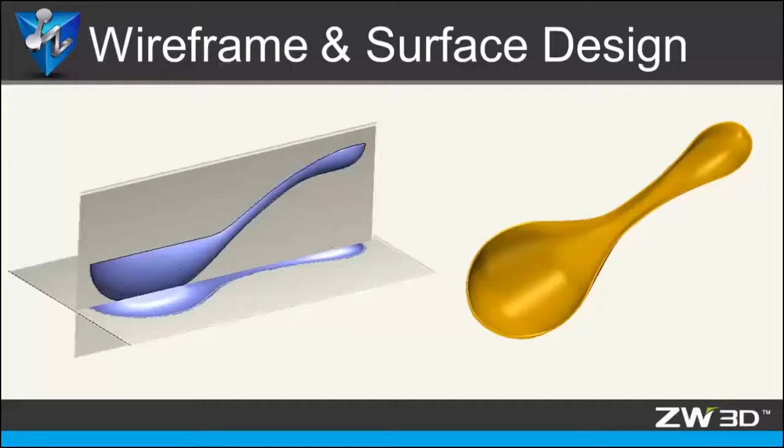Wireframe and surface design, the spoon case. Today, in this tutorial video, we will learn how to create 3D profiles based on the model pictures and how to do quality surface modeling.

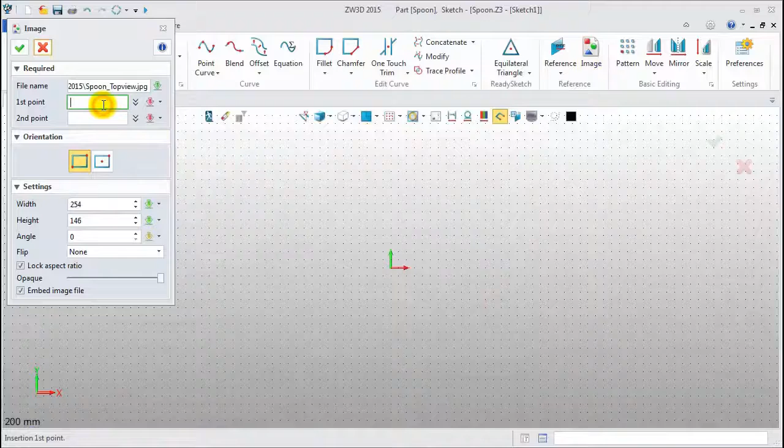First, create a new file and name it Spoon. Insert a sketch and set it on the XY datum. Click Image to insert the top view picture. Pick the origin as the first point, set width to 300 millimeters, then click OK.

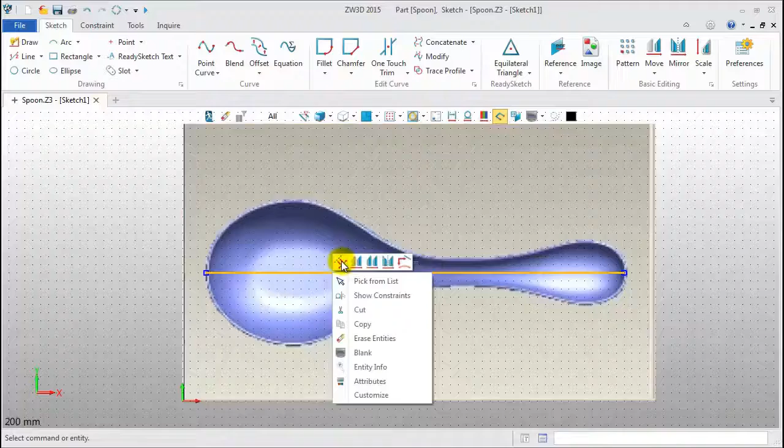Then use the Line tool to create a center line. Right-click and pick Toggle Type to convert this line into a constructive line. Then move all shapes.

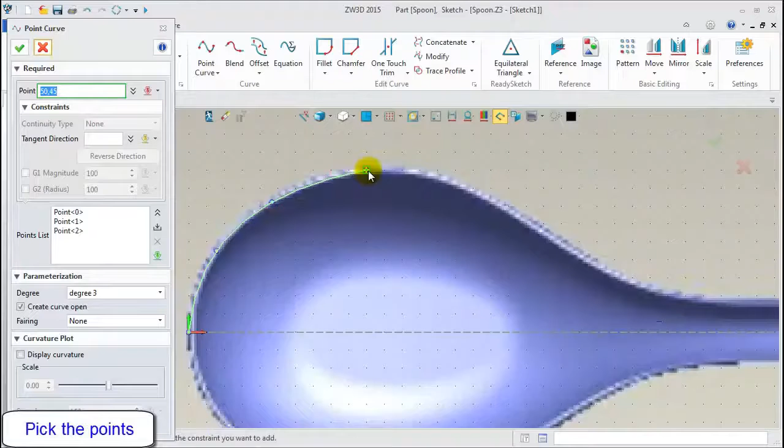Thereafter, click the Point Curve feature. Refer to the image and pick profile points one by one. Using the Curve preview, select the suitable position. Totally, about 15 points should be selected.

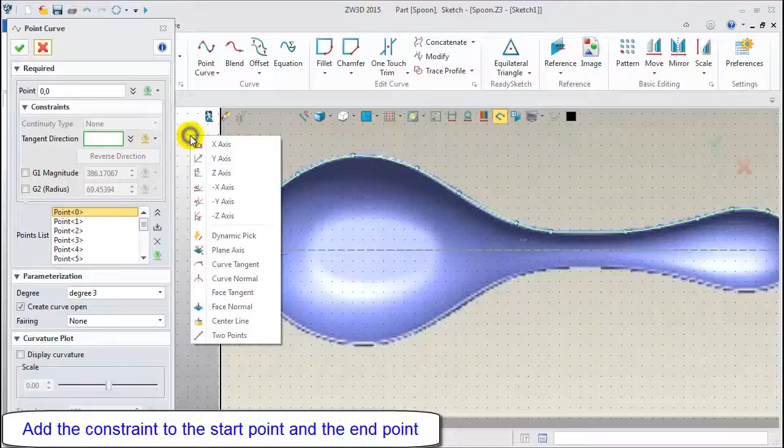After that, select a start point from the list and define the tangent direction. Pick an endpoint and define the tangent direction. Click any point and with the handle, adjust the point position.

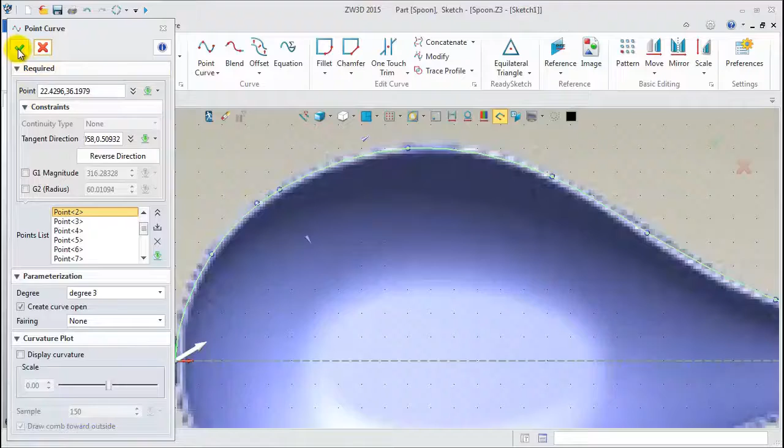Now, let's check the profile sketch. Blank the image, then exit the sketch.

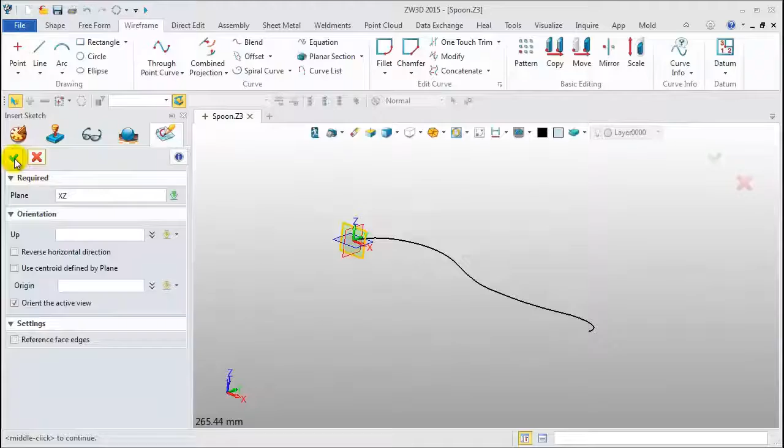Next, we need to create the second sketch. Set it on the XZ datum. Click Reference and pick the first sketch curve.

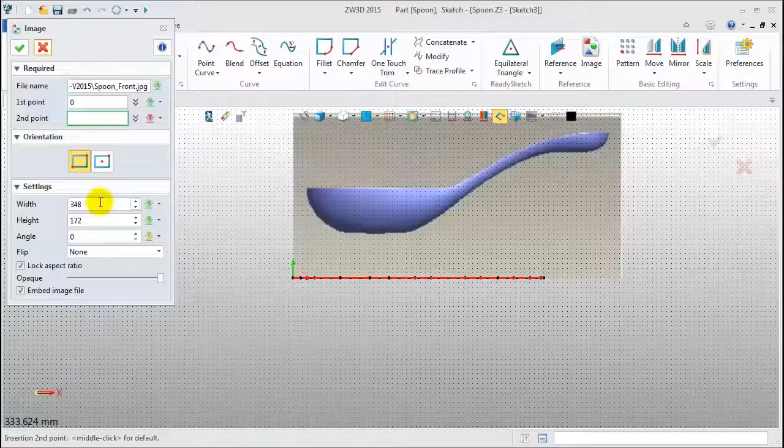Click Image and insert the front view image. Set first point to 0, set width to 300 millimeters, click OK. With the following, create some lines for relocating the image.

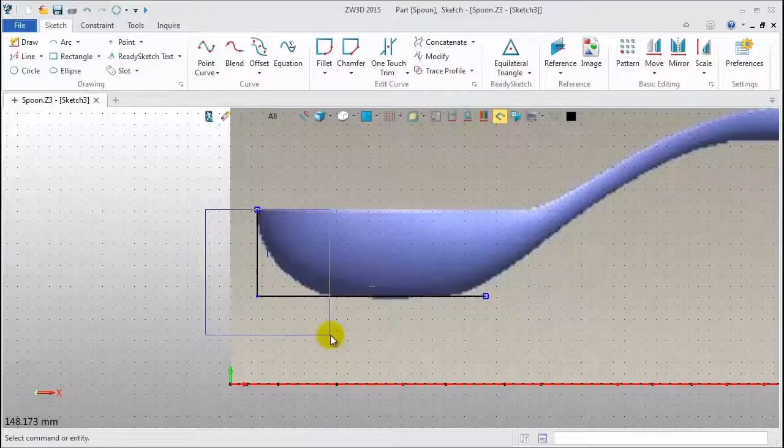Draw the vertical line like this, and draw this horizontal line. In the window, select all shapes and move them to the matched position. Then create another vertical line.

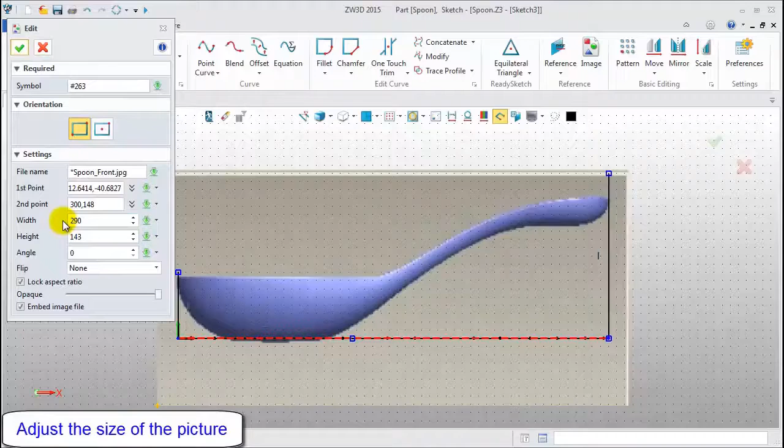Double-click the image to edit and adjust the image width. Convert these lines to constructive lines.

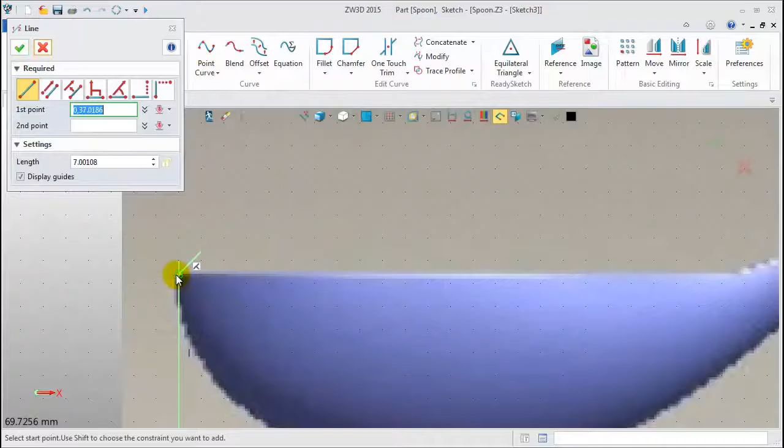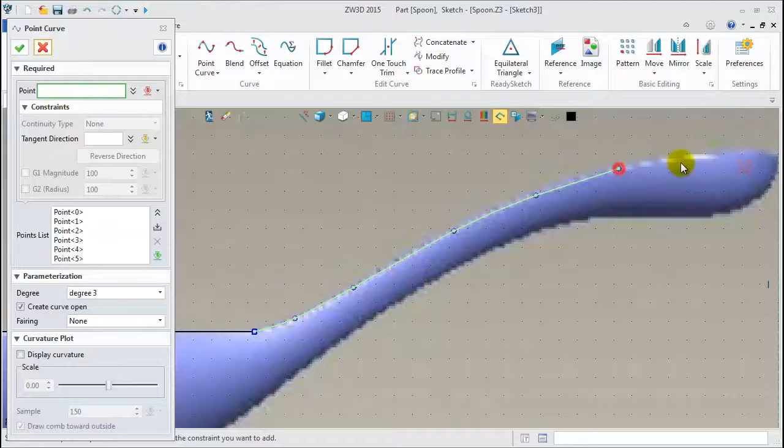Next, we will draw the profile curve, referring to the image. The first segment is a line. Click the Point Curve tool and pick the profile points one by one. The last point should be located on the vertical constructive line.

Then create a fillet on the connecting area and connect them together.

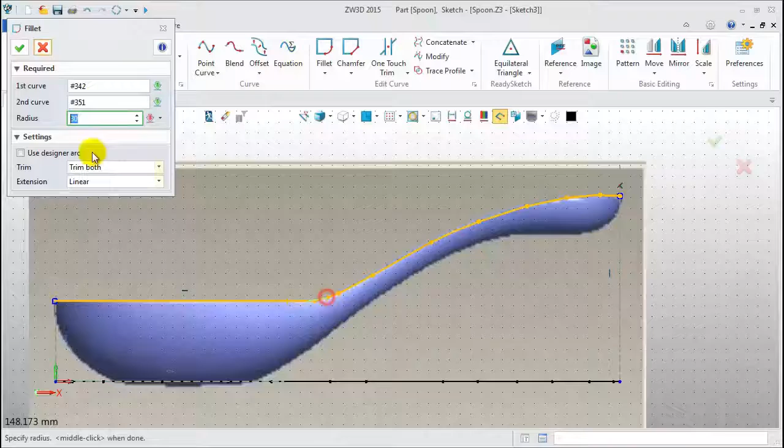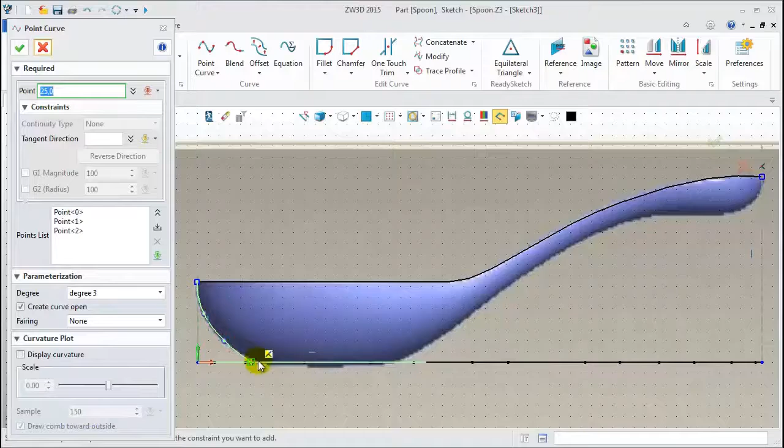Next, create the bottom profile curve. Pick points one by one. Create the second segment, picking more than 10 points according to the image profile. The last point should coincide with the end point of the top curve.

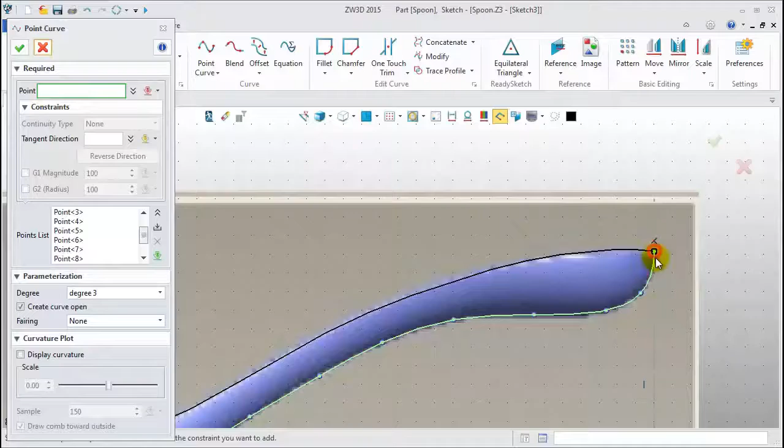Add a line, then create the fillet between curves.

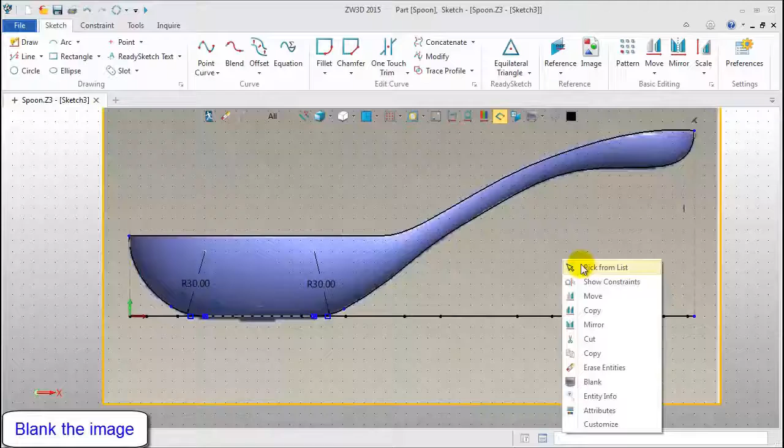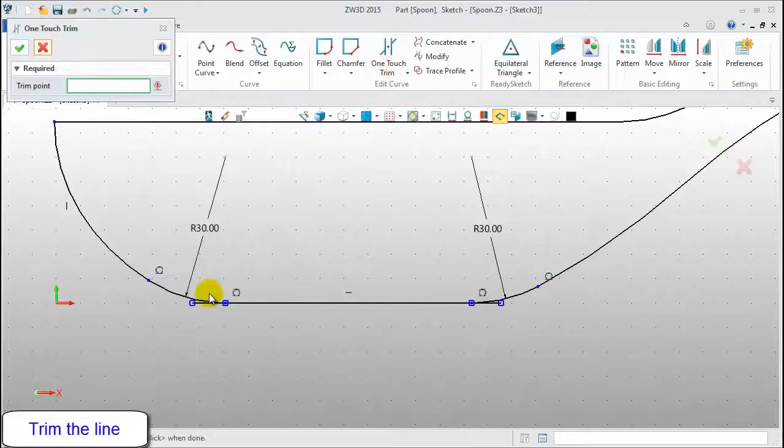Now, blank the image and constructive lines. Click One Touch Trim and pick the unneeded curve until there are no more.

Finally, connect them together, then exit the sketch.

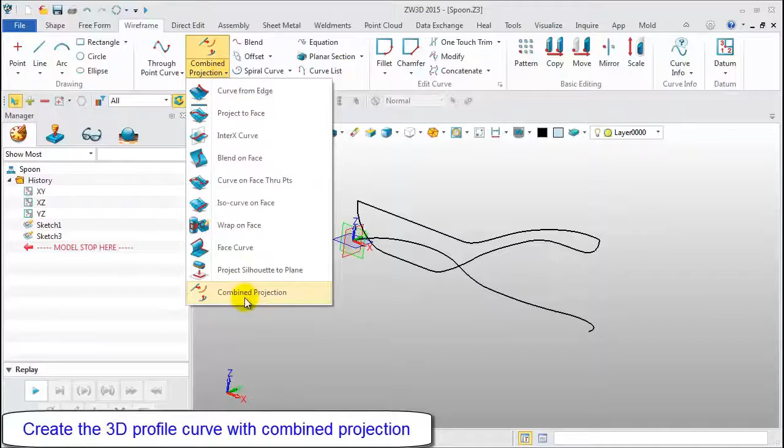Pick the Combined Projection tool. Select the top profile curve, direction Y-axis. Pick the first sketch curve, Z-axis. Click OK to get the 3D profile.

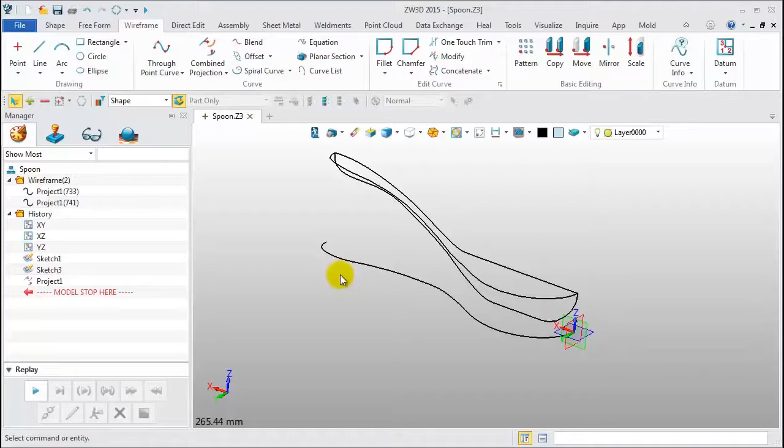Next, we will create several datums for drawing a section curve. Pick a suitable point on the bottom profile curve. Blank Sketch 1 for a clean view.

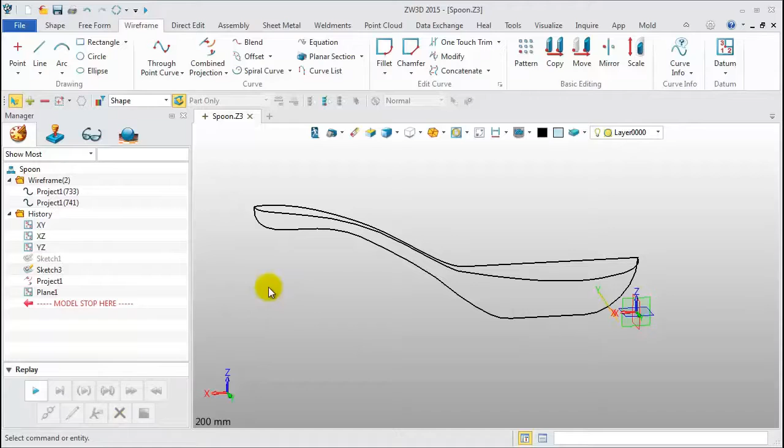Then, adding datums, click Datum and pick Point until done. Now, 6 datums have been created.

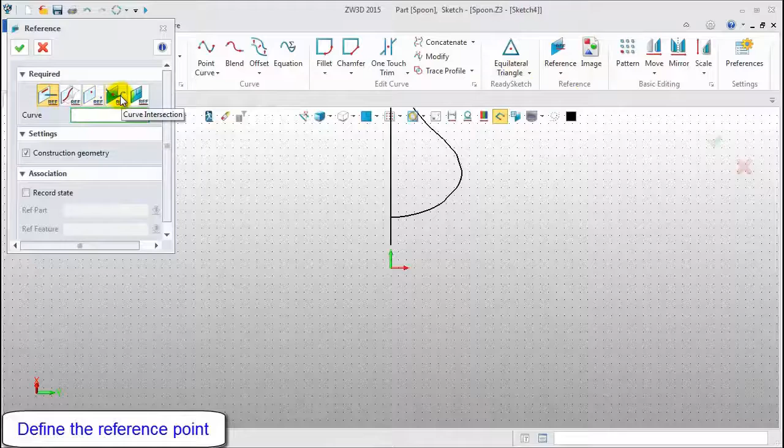In the following, draw the section profile in each plane. Click the Reference command to define the reference point. Pick a curve to get the intersection point. Click Plane View and Show Target.

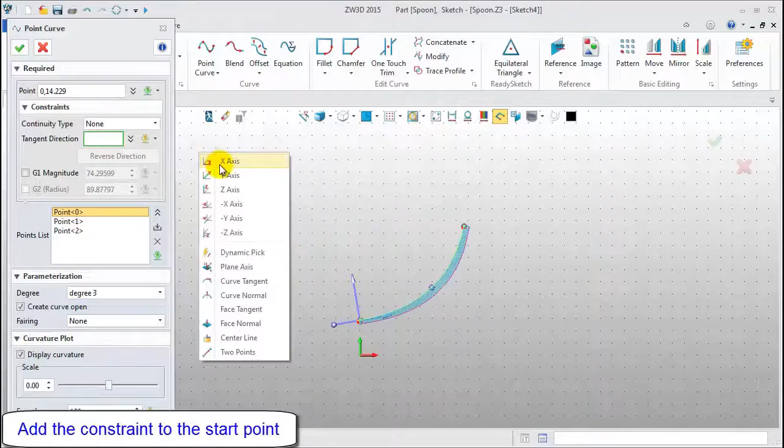Next, create a curve. Pick a reference point, a middle point, and another reference point. Show Curvature and add tangent direction for the first point. Adjust the middle point position to get the more equal curvature.

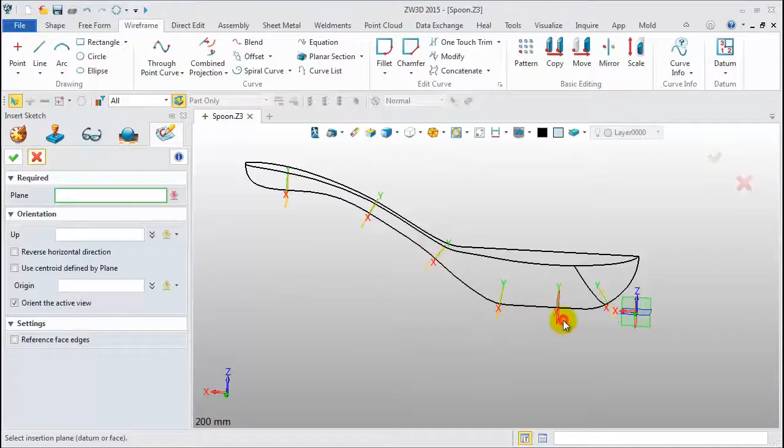Finished. After that, we will use the same method to create other section profiles. Define the reference point, then use the Point Curve command to draw the section profile.

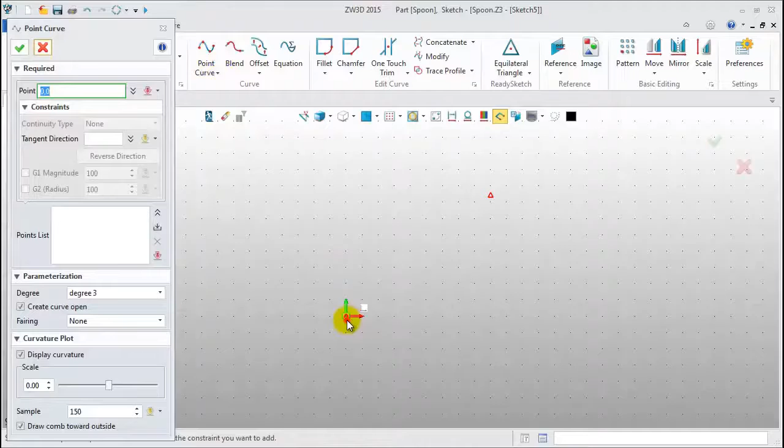Now, all 3D curves are finished. Click Extrude and pick the bottom profile curve to create a surface.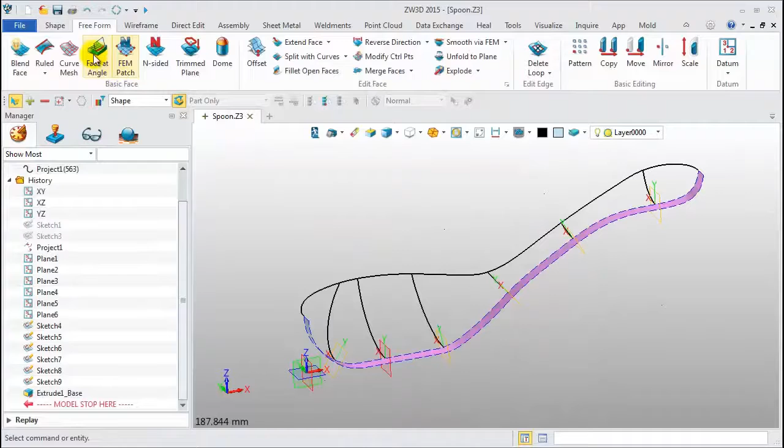Click the Freeform Curve Mesh command. Pick one curve, middle click to confirm, for 2 U curves. Select all section profiles as V curves, pick one and middle click to confirm.

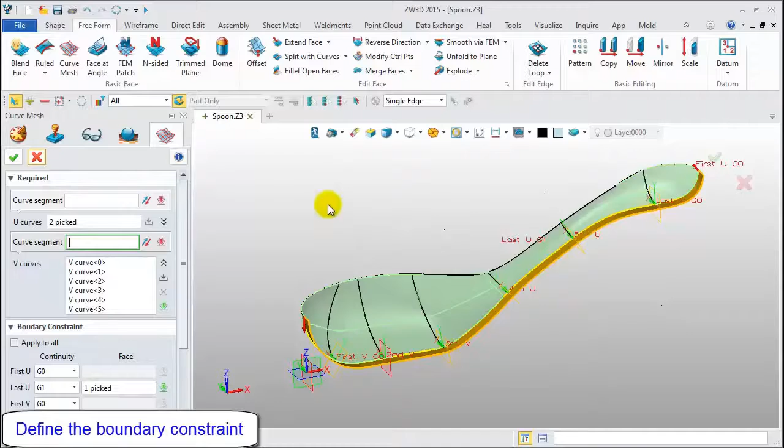Define the boundary constraint, tangent with the extrude surface. Blank the reference surface, then mirror the UV surface in the XZ plane.

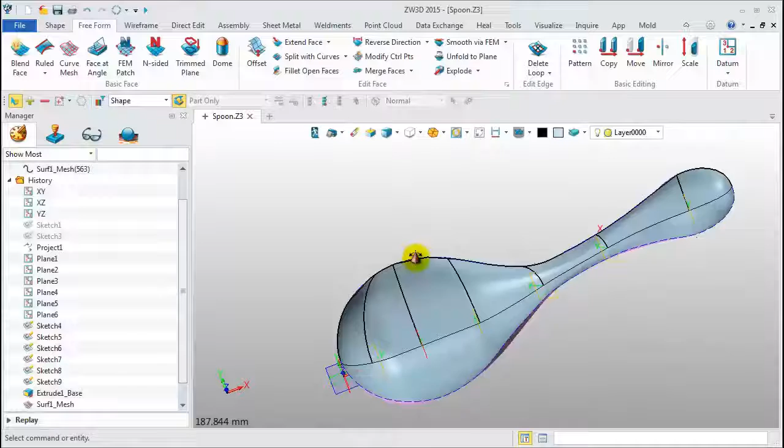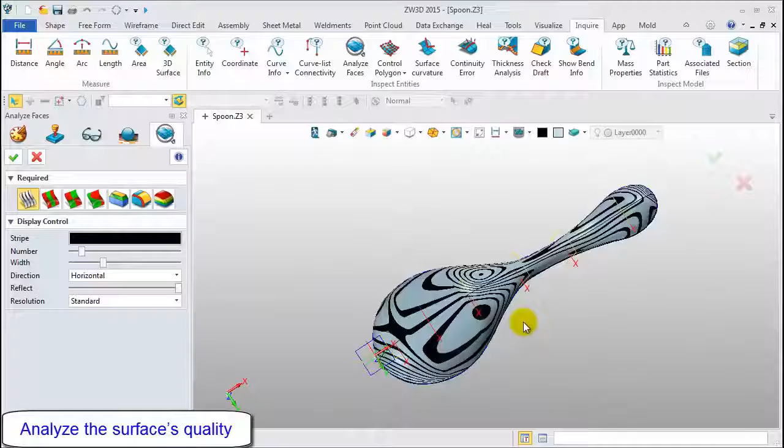Now, blank all section sketches. Let's check the surface quality. Inquire, Analyze Faces. Here we get a visible contour stripe display. The lines are continuous, meaning this surface is of good quality.

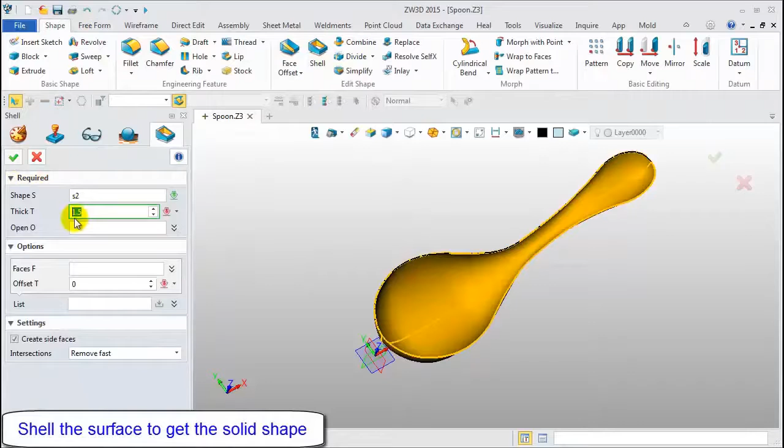Blank all planes. Last operation, shell this surface to get the solid model. Set thickness to -1.5 millimeters. Okay, this is the final shape.